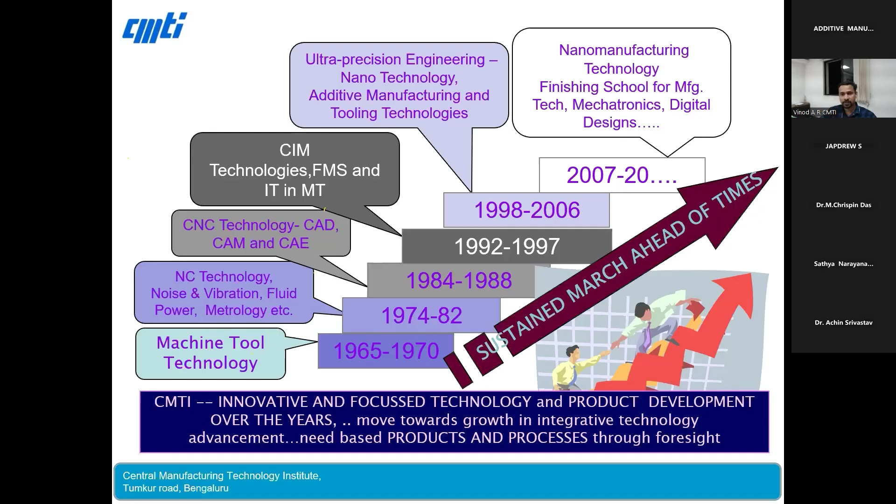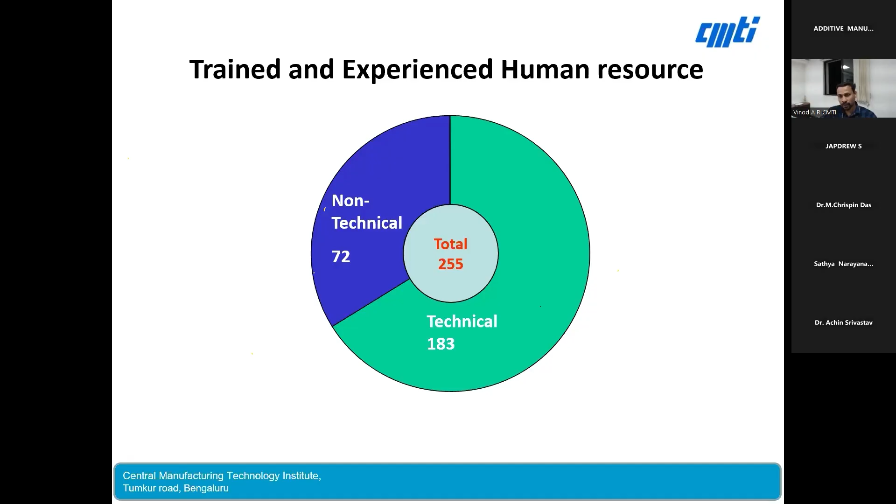If you look at our human resources, we have around 255 permanent manpower, and if you include our temporary staff, it will cross around 400 to 450. Of these, we have around 70 plus scientists, mostly technical, and around 72 non-technical staff. The location of CMTI, as I told, is in Bangalore.

That is the main center. Then we have another unit in Rajkot, Gujarat. These are the only two institutes of CMTI in India. The Rajkot, Gujarat unit is a small unit catering to metrology services in and around that region, but the main facility is already available in Bangalore, on Tumkur Road, near Yeshwanthpur.

Though we are located in Bangalore, we try to serve across the nation, reaching top to bottom, east, west, north to south—we cover almost everywhere. We also try to serve other developing nations, helping countries like Iran, Nigeria, Sri Lanka, and Indonesia to establish centers of excellence in manufacturing. That is how we do it.

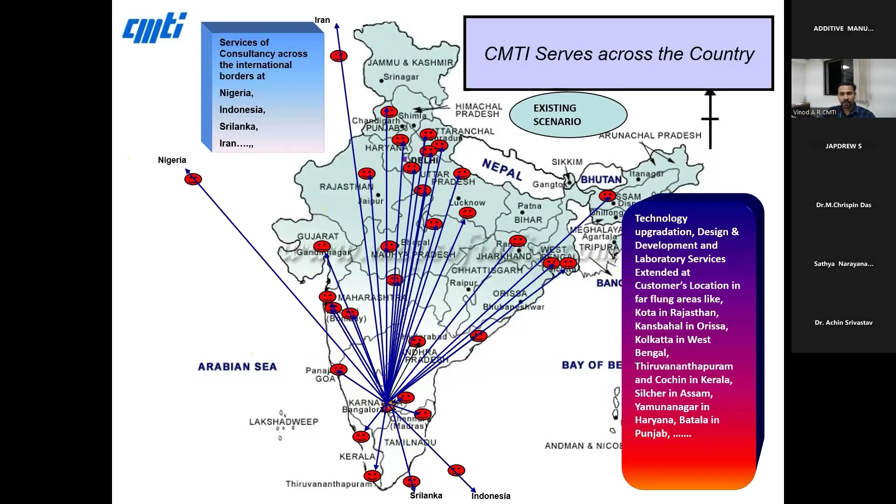Now we will come back to the core topic, that is additive manufacturing. Since you are all mechanical, you'll be aware of it. Conventional manufacturing techniques, like CNC machines, generally start with a block of material, and to make the final shape, we need to remove material. Using a cutting tool, we remove unwanted material and arrive at the final shape. That is the conventional way of manufacturing in the CNC route, known as subtractive manufacturing.

There are other technologies too, like forming technologies—casting, welding, joining processes. Additive manufacturing differs from these conventional methods because in additive manufacturing we add material layer by layer, reading a CAD model, so that finally you have the three-dimensional physical part ready. So in contrast to subtracting or joining material, here we essentially add material to get the final shape. That is how we work in the additive manufacturing process.

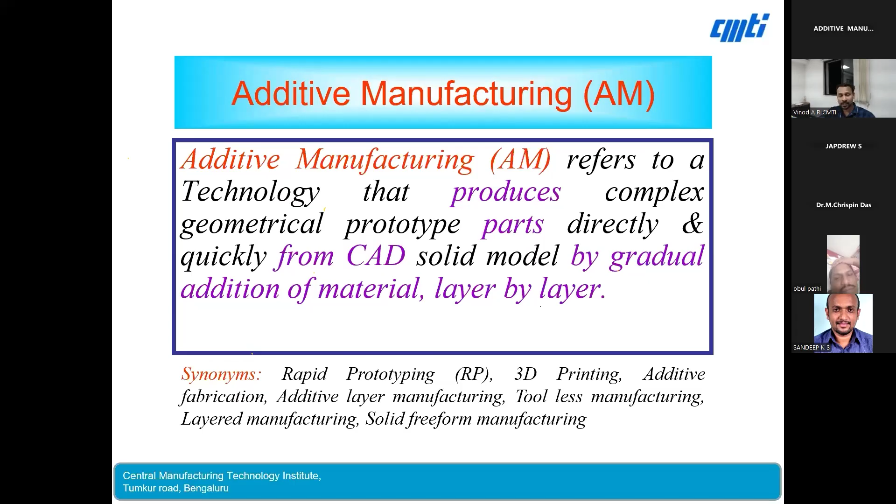There are many synonyms for additive manufacturing. In the early days, around the year 2000, this technology was known as rapid prototyping, or RP technologies. Now it is widely known as 3D printing, which is probably the most popular buzzword. There are other names too: additive fabrication, layered manufacturing, additive layer manufacturing, solid freeform fabrication, toolless manufacturing, and so on. But the international bodies have given this the name additive manufacturing as the internationally accepted nomenclature for this class of technology.

Looking at an analogy from nature, we can compare additive manufacturing to something already available in nature—you might have seen honeybee hives. Honeybees secrete a resin-like or adhesive-like material from their bodies, which gets deposited onto tree tops or rooftops. Over one day, they deposit one layer, and on the second day they deposit on top of the first layer. Over a span of several days, the honeybees build their hive layer by layer, and finally you have the complete honeybee hive.

If you look at the shape, it is so complex that you cannot make it by a CNC machine. The reason is these honeybee hives have hexagonal pockets inside. By CNC machine, you can probably machine the outside pockets to some extent, but the inside pockets form a three-dimensional network that cannot be approached by the CNC route, because the tool cannot access inside pockets.

Nature has made it very simple, by this layer by layer approach, making complex shapes which are not conventionally possible to make by machining processes. If you do the same technology, layer by layer addition of material, in the engineering domain, we call it additive manufacturing.

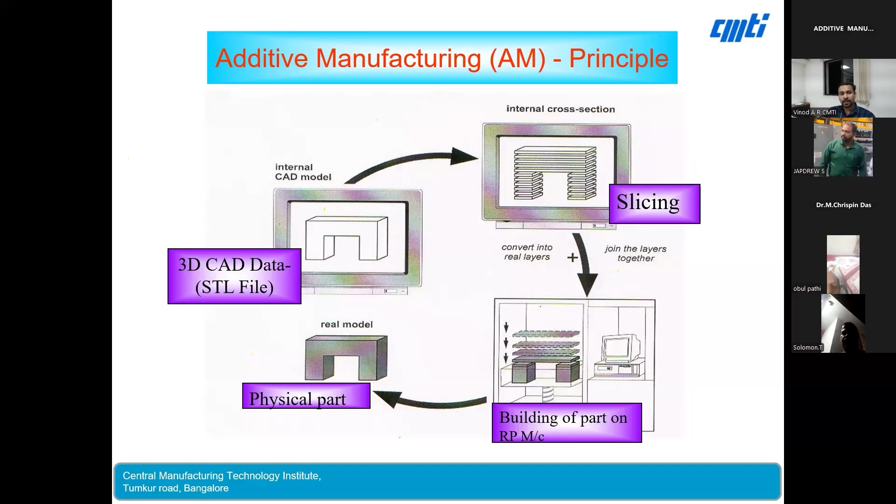Now let us understand, since you have different types of technologies available, why do we need to go for an additive manufacturing process? What are its advantages? Let us understand this, then we'll go ahead with the different technologies.

One advantage is to reduce the lead time in product development. Whenever you talk of NPD, new product development, let's say a designer is designing a new part. Before launching into the market, you need to first make a prototype, and then test its functionality, its aesthetics, and its performance. So when you want to make a prototype, you need to go for a manufacturing process.

For example, if you take a mobile phone or any other part, you need to go for a plastic injection mold. When you want to manufacture injection molds by CNC process, you have to wait, let's say, a few days or few weeks. If it's a highly complex or large part, you need to wait a couple of weeks sometimes. So let's say in two weeks time we have made one tooling.

Using that tooling you make the product or prototype, then you test it, and you realize you need to make some product changes. So for the second iteration, you need to make another prototype, which again takes a couple of days to manufacture. Design, if you look at it, evolves by itself. If there are some 4 or 5 design iterations, it will naturally take a couple of months together to bring the part from design to final stage.

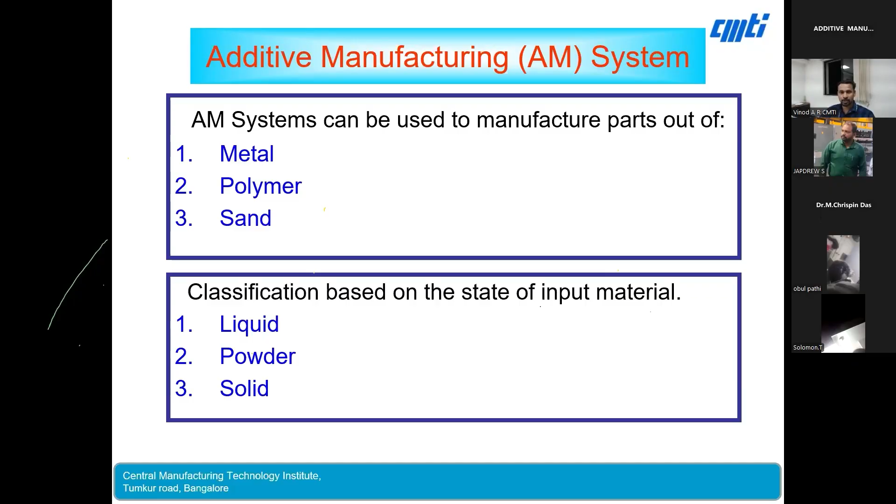Accordingly, you have different types of additive manufacturing processes. As per ASTM F42 committee, that is an international committee who works on the standards for additive manufacturing, they have classified all the different types of additive manufacturing processes globally available into 7 fundamental processes. So these are the 7 types: VAT photopolymerization, material extrusion, binder jetting, material jetting, sheet lamination, powder bed fusion, and directed energy deposition.

These are the international names. If you look at a typical company's machine, they will call it by a different name. For example, stereolithography - this is from a company known as 3D Systems in USA, they call it the SLA process, that is their trade name. Similarly you have solid ground curing. These are all trade names. For example, fused deposition modeling, FDM, that is from Stratasys USA, that is a trade name. All these technologies are similar, and they can be classified under one of these 7 fundamental categories.

In today's session, if you look at VAT photopolymerization, basically they are for making parts out of photopolymers, light sensitive material using laser. So this is photopolymer based. Then material extrusion also is primarily for polymer parts, like ABS material, PLA materials. You have different materials like that.

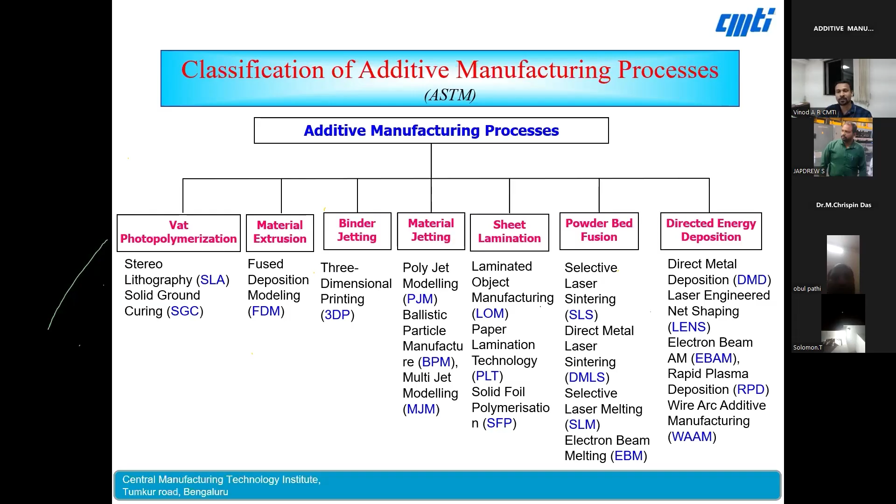You can see these different types of processes and the different materials being used. For example, in stereolithography process, as I told, it is liquid epoxy resin, light sensitive material, which is cured by using a UV laser. In fused deposition modeling, the raw material is in filament form, which will be extruded through a heated extruder head to print the part layer by layer. In three-dimensional printing, you will be spreading a material, then dispensing a binder material. Then polyjet modeling uses photopolymer. So you can see here all these are mainly polymer-based materials.

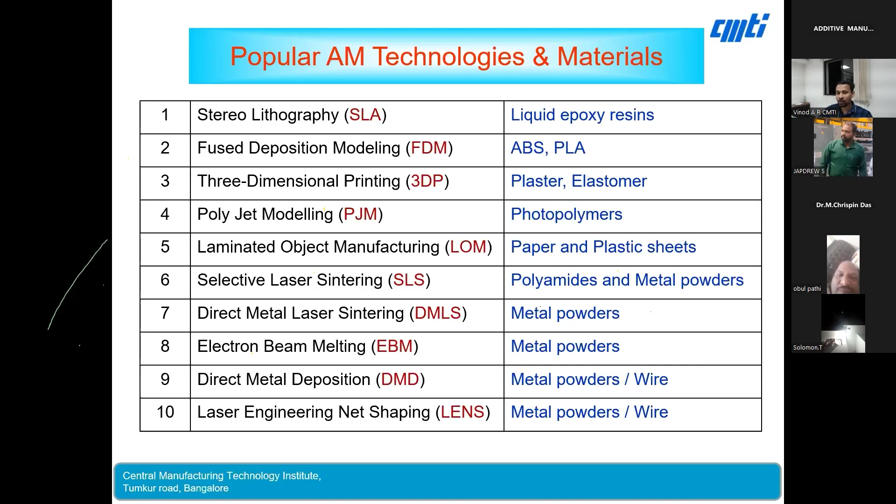Whereas when you come to SLS and DMLS, we can see from here onwards - selective laser sintering, direct metal laser sintering, electron beam melting, direct metal deposition, or laser engineered net shaping. These technologies primarily use metal powders. Especially in the last 2 technologies, you can use either metal powder or wire as the raw material. We'll be seeing these technologies in detail.

Coming to the facilities at CMTI, in fact, we were the first to install a metal 3D printer in India way back in 2000. So 25 years back, we established our first metal 3D printer. Now, if you look at it, there are around 80 to 90 plus machines available in India, that is powder bed fusion. At that time, only one type of material was able to be processed. Later in 2007, we upgraded our machine to process more number of materials.

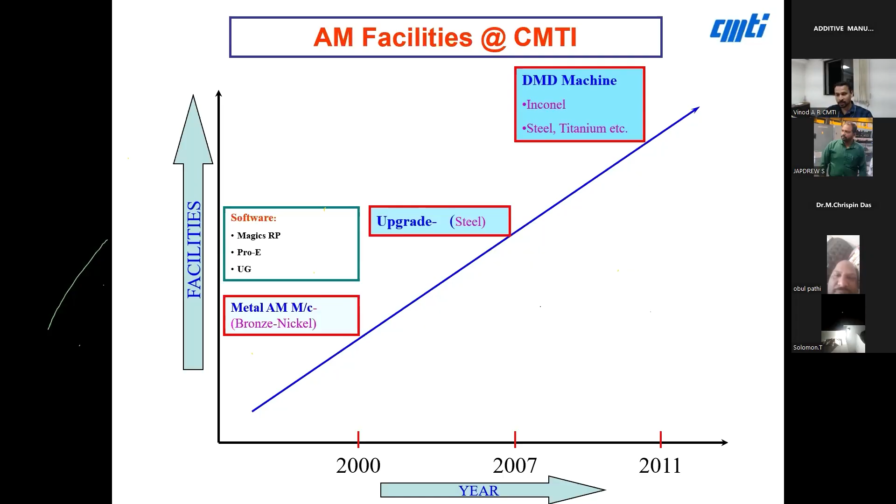Later in 2011, we got our direct energy deposition (DED) technology, which is a 5-axis machine. So we'll see it one by one.

The main objective of the Additive Manufacturing Center at CMTI is to serve industries using metal additive manufacturing solutions, helping them accelerate product development and create solutions for industrial applications. Along with offering services and solutions, we also develop machines, focusing on customized additive manufacturing machines for Indian industries. We also try to disseminate this technology to industries through training programs and guest lectures, reaching both industry and academic institutions.

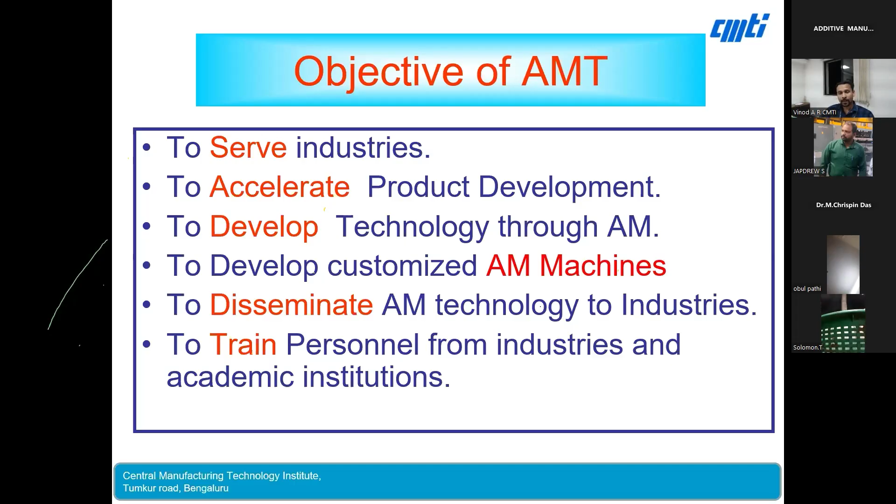Coming to the facilities, as I mentioned, one is powder bed fusion. We have laser-based DMLS, direct metal laser sintering. Then we have laser-based direct metal deposition, DMD. These two are the metal-based additive manufacturing facilities available at CMTI.

We also have another one, projection micro-stereolithography, which was developed by CMTI itself. Basically it's a projection-based 3D printing process used to produce photopolymer-based micro parts, which can have a feature size down to 5 microns.

We have also developed a smart IoT-enabled 3D printer, which can be remotely controlled and monitored. Then there's a smart foundry with 3D printer, also developed by CMTI, which has been deployed at the National Institute of Advanced Manufacturing Technology, Ranchi.

Along with these developments, we also have related software for all these technologies, including Magics, Unigraphics, and Siemens DMD CAM software.

Now we will start with the powder bed fusion technology, that is direct metal laser sintering. This is the first metal 3D printer in India, available at CMTI. This is the machine and these are the subsystems around it.

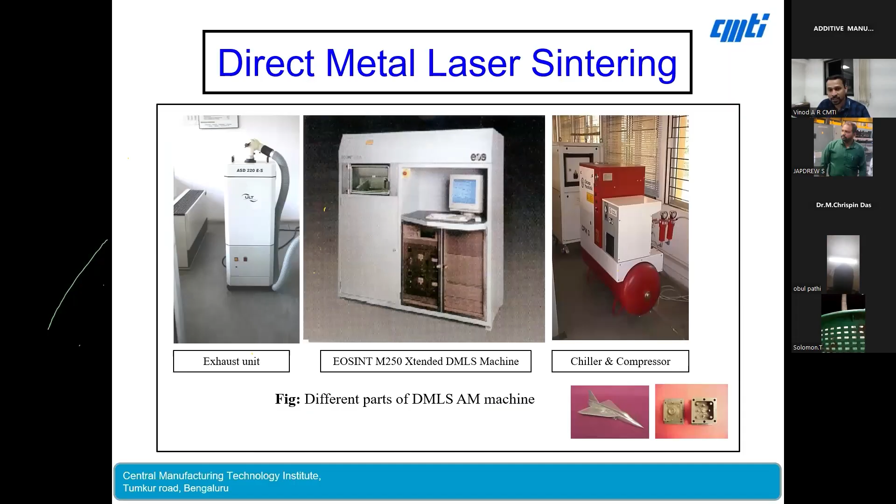If you look at the machine architecture, it is something like this. There are two platforms. One platform is filled with material, in the form of powder, around 20 to 50 microns in size, filled onto a reservoir on the right side. On the left side you have a platform, 250 by 250 size in the XY plane, which will be mounted here. There are two Z-axis motors which can move this up and down.

On top you have a laser source and a scanner, a galvo scanner with two mirrors. There is also a recoater arm or recoater blade, which will move to the rightmost end.

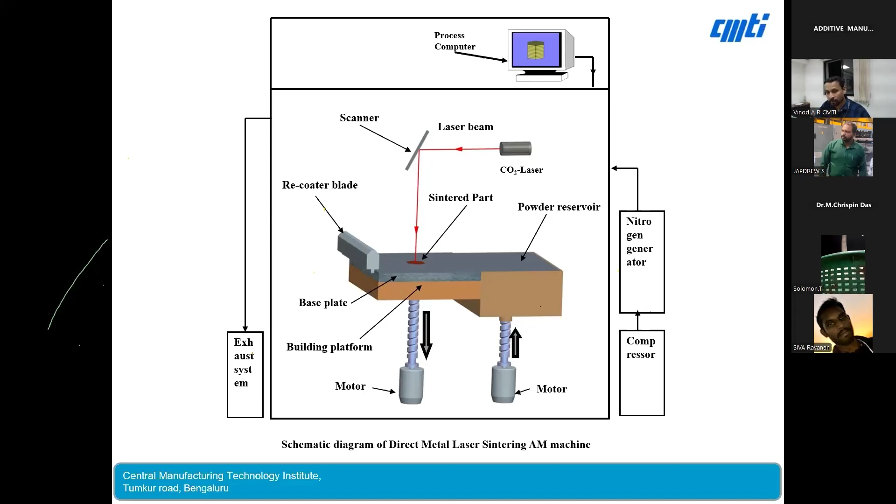This is the sequence of operation: the recoater arm moves to the rightmost end, then the platform containing the raw material powder rises up, and the recoater arm spreads the metal powder onto the build platform. From the top, a laser controlled by a galvo scanner controls the XY movement of the laser beam, focusing it onto the powder bed. Wherever the laser falls, the metal powder fuses completely to form a solid block.

Then the platform goes down again by one layer thickness, and powder is recoated. This cycle continues, recoating and melting layer by layer. This is how the sequence of operation happens in the powder bed fusion process.

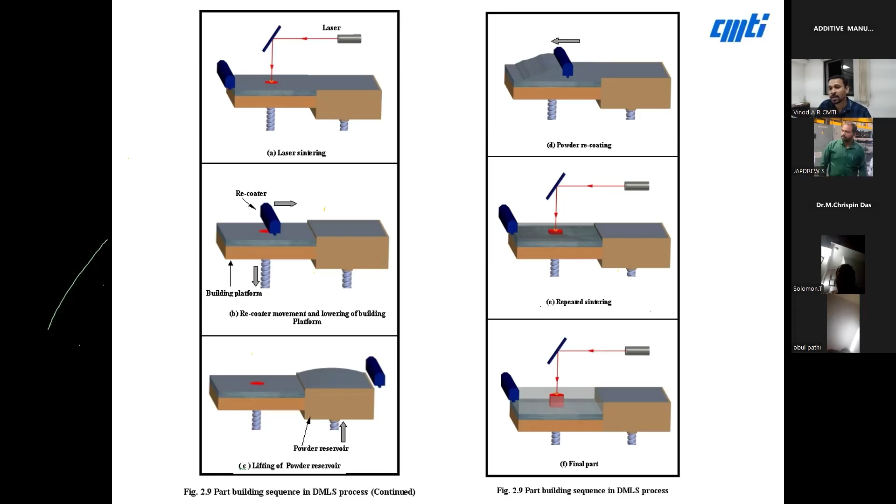Now looking at the applications of powder bed fusion, there are different technologies available. This process uses laser, but sometimes instead of laser, electron beam can be used to melt the powder. With electron beam, you can process only metals, only conductive materials. With laser, you can process either metals or even polymers. Laser-based processes also have higher resolution, better accuracy, and better surface finish.

Whereas in electron beam process, the surface finish will be a little poorer and resolution will be lesser compared to laser, but productivity will be higher. Electron beam based processes are very much used for biomedical applications. But for other applications like aerospace and defense, laser-based technologies are more widely used now.

If you look at the applications, one is for making metal parts, which could be for functional tests, for checking form and fit, or for end applications. Many additive manufacturing parts are flying components now, especially for aerospace applications. It is not only for prototype purposes; the final parts used for actual application can also be produced by this process.

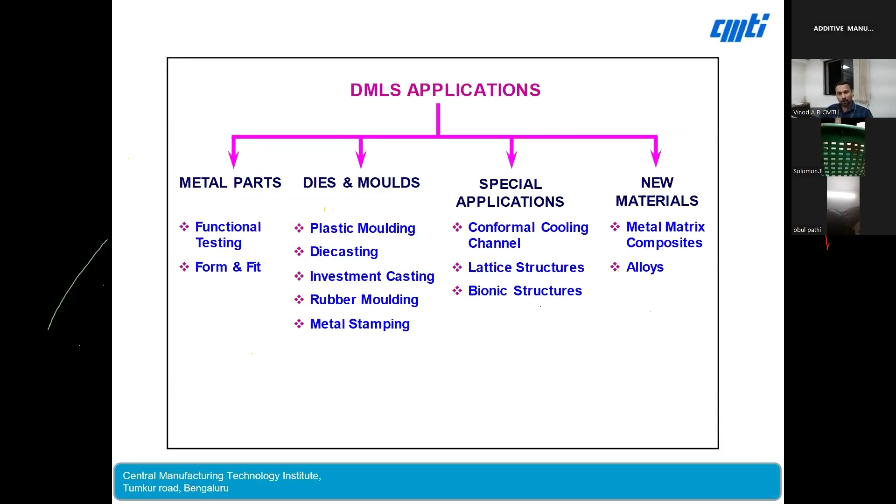So these are the different applications. Now I will give you case studies, typical industrial applications that we have worked on at CMTI.

This is a 1:30 scale down model of an LCA aircraft, around 500 long. Since our machine has a limitation of 250 by 250, we split the part into three, 3D printed them, and then assembled to make this 500 long part. This 1:30 scale down model was used for wind tunnel testing. It took around 100 hours to realize this part by 3D printing, whereas the same part fabricated through conventional process took more than 1.5 months. So 1.5 months by conventional route was reduced to 100 hours by additive manufacturing.

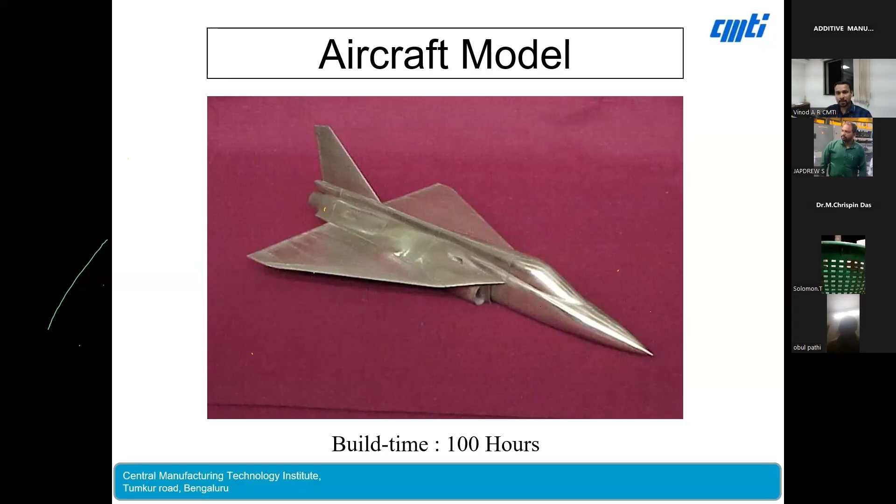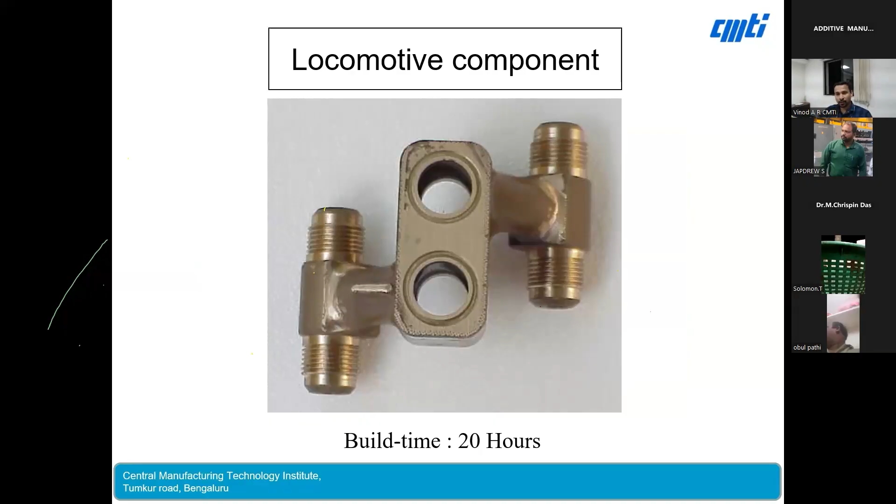Here's another example, an automotive or locomotive part that was printed. You can see the geometry—it has got some thread and two branches. This took only 20 hours to manufacture by this process. The same part, if manufactured by conventional process, would have to be split into multiple pieces, fabricated individually, and then assembled. Here it was manufactured in one go.

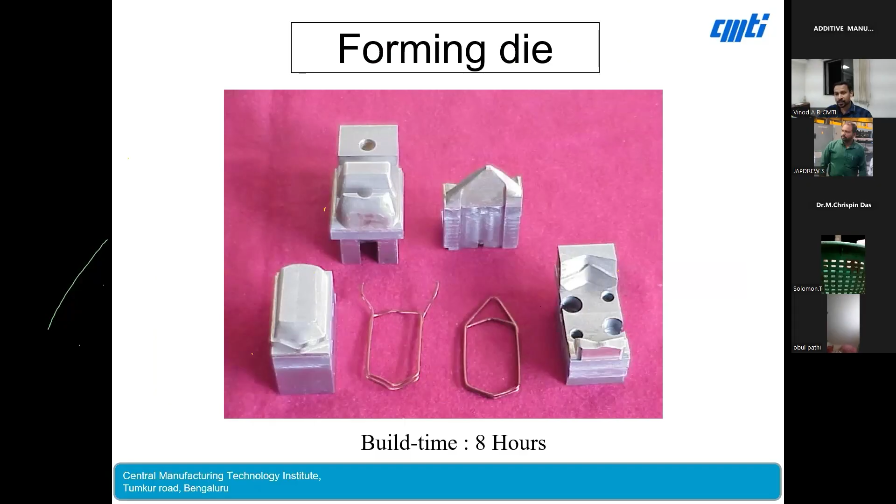This core and cavity was printed in one go, fabricated within 5 hours. Likewise, you have several examples, such as a forming die. This copper foil coil was transformed from one shape to another using this die.

This die was manufactured by this process within 8 hours. You can see bevel gears, for example, this one for an instrument, which will be injection molded from this core and cavity shown on top. This was fabricated in one go using this 3D printing process within 3 hours.

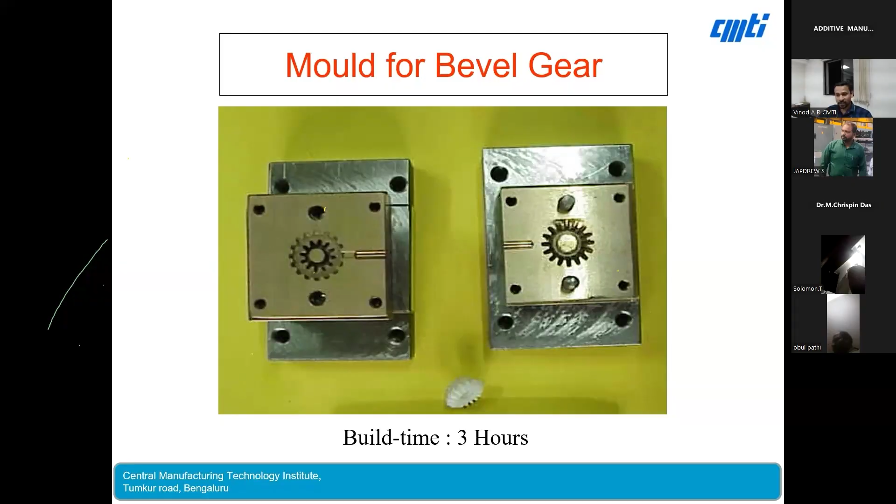You can see some more examples with steel. Previous molds were made of a bronze nickel based material, but this is a tooling steel, basically an H20 tool steel, used for the electronic industry to fabricate this.

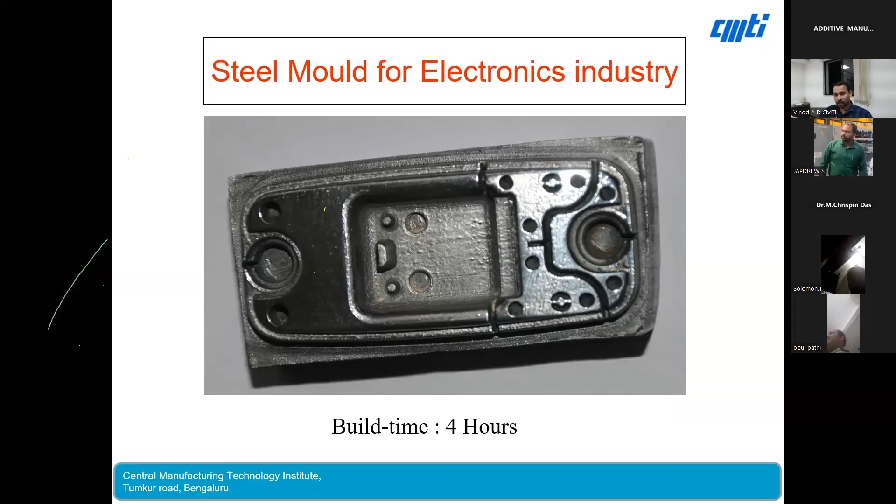Another beauty of this process is that even with multiple components, for example, you can see 6 different parts, all of which can be 3D printed at once in one go. Here you have a 250 by 250 platform where you can arrange all the different components. If you have still smaller parts, you can arrange them in the remaining space. So in one go, all the different parts will be printed. Within 16 hours, all 6 different components were printed.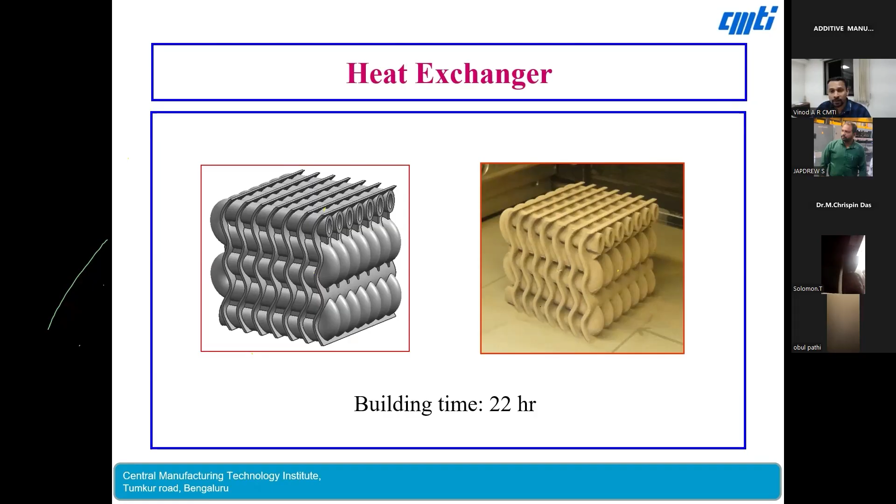For example, inside you can introduce turbulators, which is not possible in the conventional process. Or you can have a different design of heat exchanger with gyroid structures inside, giving higher surface area for higher dissipation of heat. So the thermal efficiency can also be enhanced, giving you compact heat exchangers with lesser cost and time.

Then you can see another example of a diesel particulate filter. This is an example with honeycomb structures. If you look at the shape, it is not a straight honeycomb. If you see the cross section, it is inclined, with three different angles within this design.

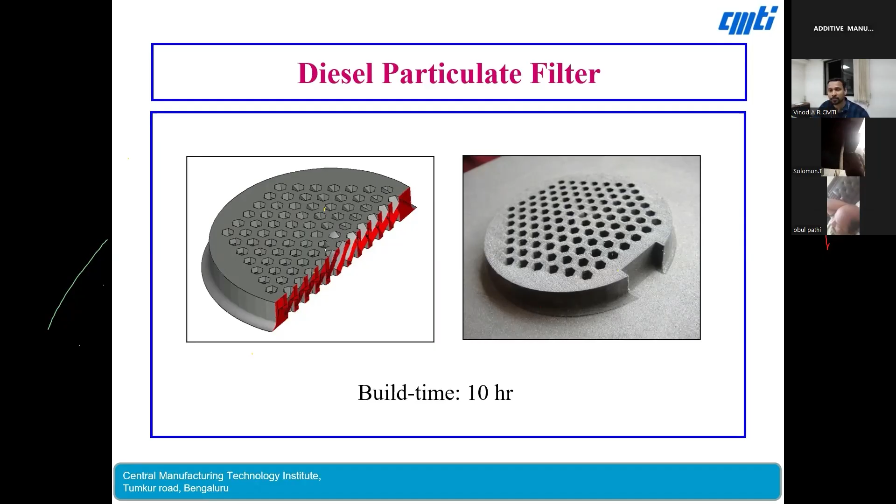If it was a straight cut, we could have done it by die sinking or wire EDM, but here it has an angle, and the angle is not straight - it changes at least twice within the geometry. This was quite difficult, almost impossible, by conventional machining route. So this was made by the 3D printing route, printed within 10 hours for automotive applications.

So coming to next, that is about the industrial application examples for the powder bed fusion process. Next, the most popular metal 3D printing technique is direct metal deposition, DMD. This is a machine at CMTI. It is a 5-axis machine.

Here, what we primarily do is have a laser delivered through a nozzle. Through the same head, you deliver the material - either a powder or wire - and inert gas like argon is also fed through the same nozzle. The laser is focused onto the area where deposition is needed. When the laser focuses, it forms a molten pool, and the metal powder or wire fed to it also gets melted. This whole head moves in 5 axes.

You can have 3 linear axes like X, Y, Z, and 2 rotary axes. So in DMD, you have a head with an energy source like a laser or electron beam, or it could even be an electric arc or plasma.

Different heat sources could be used. In this machine we are using laser basically. To monitor the process, you will have sensors like CCD cameras that will be looking at the melt pool to monitor the layer thickness uniformly.

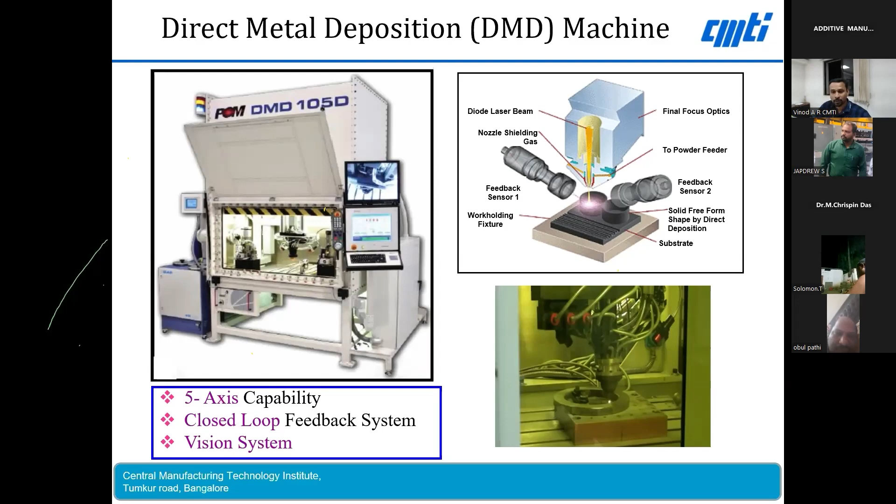Or you can have a pyrometer to measure the temperature and control the process. With this machine, you have a 1 kilowatt laser. The part size is around 300 by 300 by 300, all XYZ 300. You can process most materials like different types of tool steel, stainless steels, Inconel, and titanium-like materials can also be processed.

Coming to applications, in addition to conformal cooling channel printing, you can also do coatings. For example, if you have an existing part, you want to coat upon that. This is not possible in the previous process, that is in powder bed fusion, the DMLS process, we cannot do coating, especially on a 5-axis 3D surface, because there you are spreading the powder layer by layer.

But here we are not spreading. Instead, we are injecting the metal powder or wire onto the surface. Since it has got 5-axis capability, you can do coatings on existing surfaces. You can also do repair or remanufacturing of expensive parts.

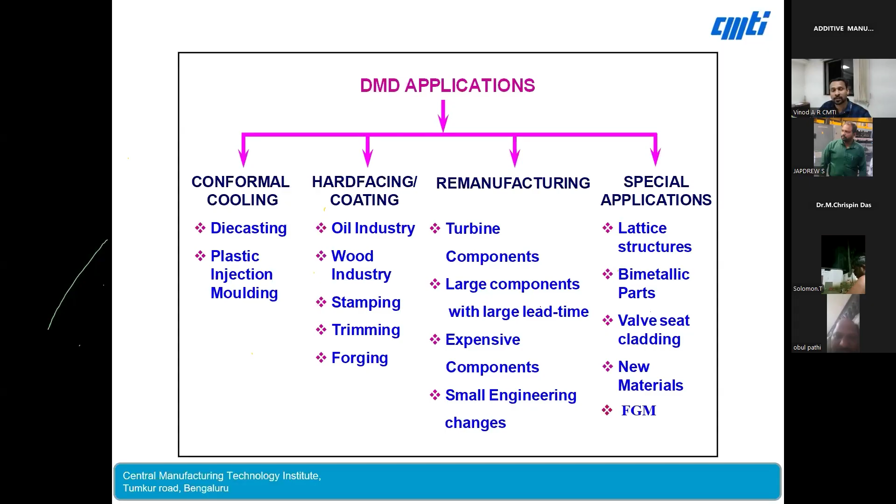Then you can have special applications like bimetallic parts, that means multi-material components, if you want to 3D print. Functionally graded materials you can also do. The multi-material 3D printing is very much feasible in this DMD process, direct metal deposition process.

I will explain with some examples. You can see some industrial examples. This is a pump part which was used for aerospace application for ADA. Here we have to join the steel on top to the bronze on the bottom. These two different materials have different properties, different thermal expansion coefficient, different melting point, different specific heat.

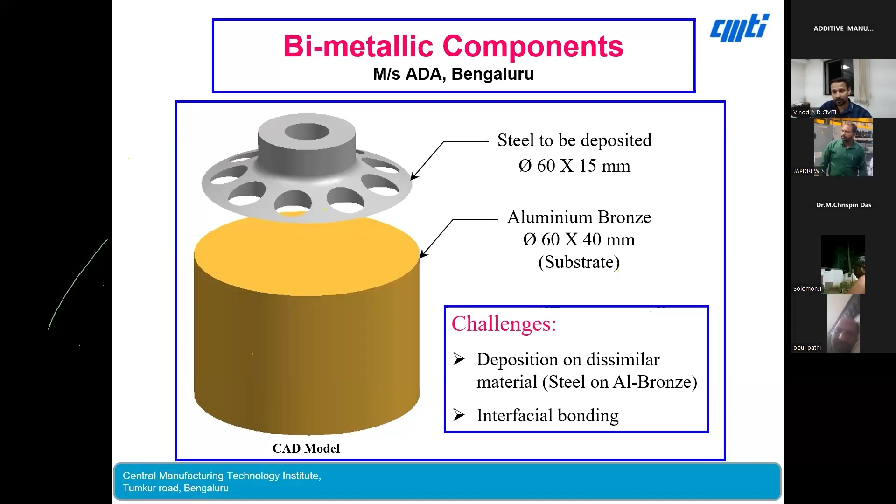Especially when you have two different materials with different properties, it's difficult to join. Generally we use processes like friction stir welding for joining, but there you cannot ensure a uniform bond throughout the surface. That was the challenge we faced, and we successfully developed a technology wherein we can deposit steel onto the bronze base, so that we get good interfacial bonding between the two materials. Finally you can see this bimetallic pump part, an axial piston pump made for aerospace application.

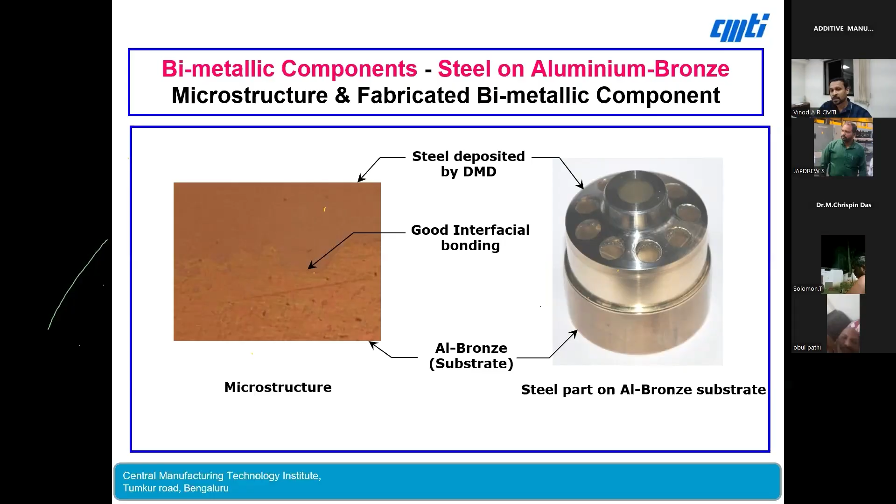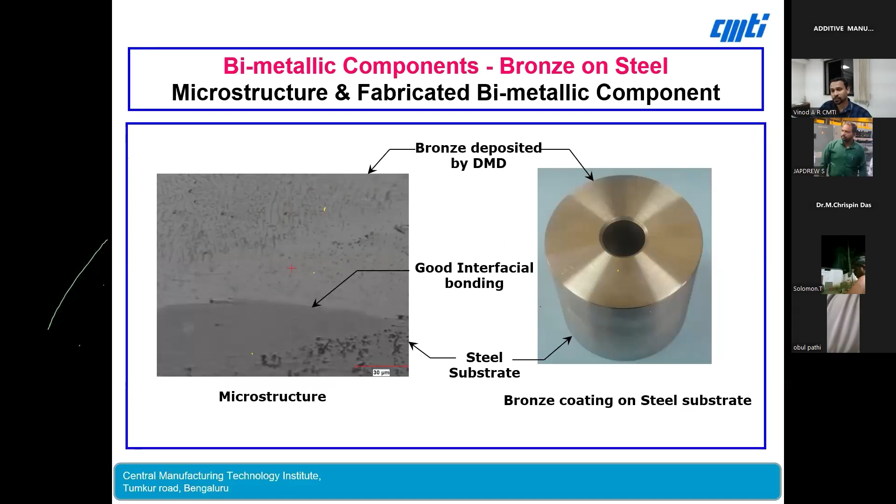Similarly we have done the reverse combination. In the previous case we deposited steel onto bronze; here we deposited bronze onto steel. We did extensive characterization in terms of microstructure, micro hardness, and bond studies to ensure there is a good bond between the different materials.

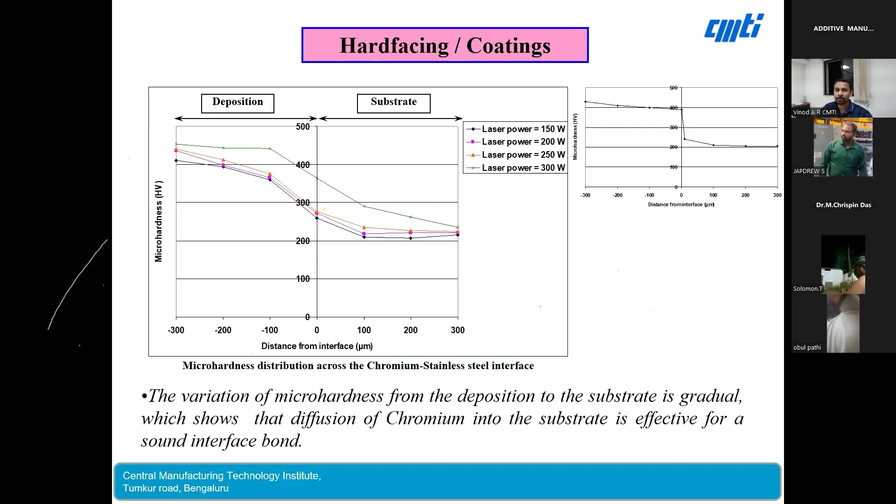We did microstructural characterization and grain size analysis, studying how the grain varies with process parameter variation. This is another example we did for VSSC, for space applications. Here we coated a special material called cobalt-nickel-chromium-aluminum-yttrium alloy, a high entropy alloy, onto a cobalt-based substrate like stellite material.

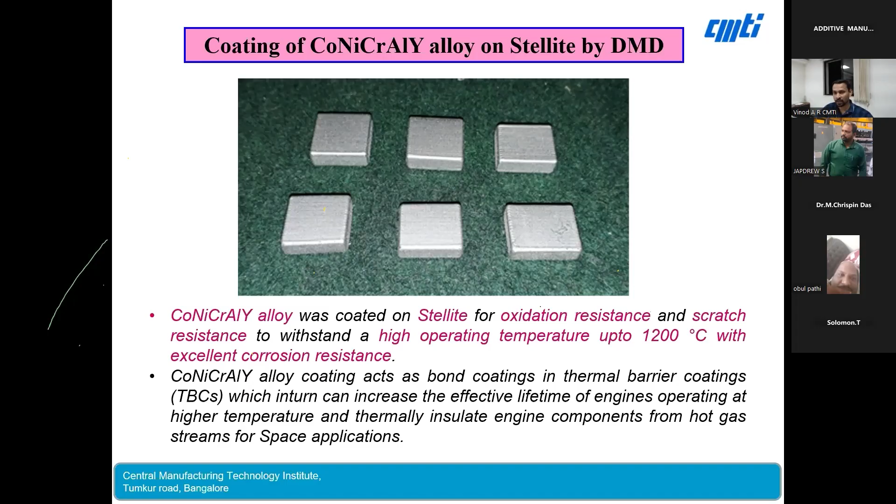Conventionally they do this through a plasma spray technique, but here we did it through the DMD process, direct metal deposition, and compared the life of plasma sprayed coatings versus DMD coated coatings. It was tested for oxidation resistance and scratch resistance up to 1200 degrees Celsius, and it was proven that the DMD coated coatings had higher life compared to the conventional plasma sprayed coating technique. This we did for nuclear applications along with IIT Madras.

This is a Colmonoy coating on SS316LN, again for wear resistant coating. It is effective even up to 600 degrees Celsius, able to retain its hardness without much wear. So this is another example where we can use DMD for coating applications.

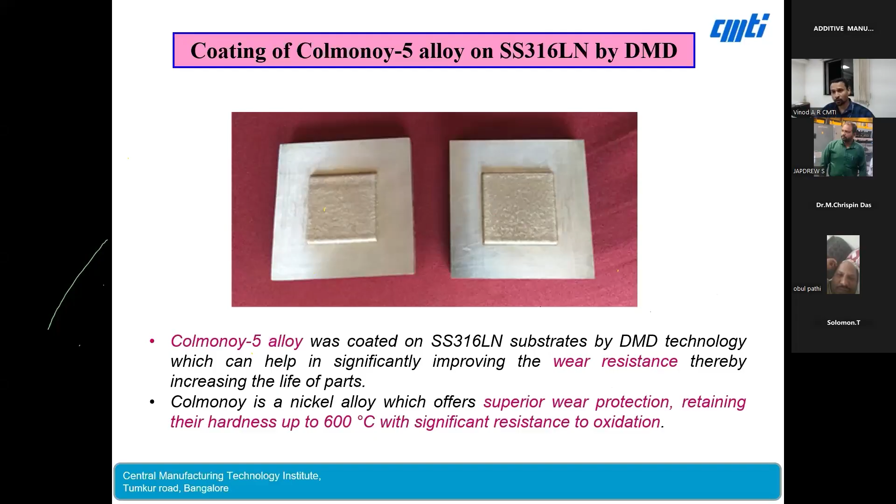This is for remanufacturing application. This is an example of a turbocharger shaft used in automotive applications, which rotates at very high RPM. There is a groove here, which will wear out after some hours of operation.

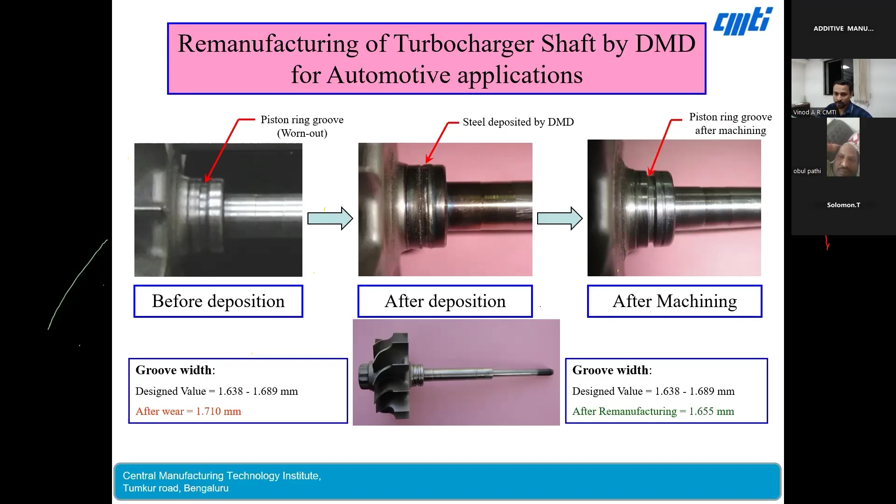Initially when the customer tried with the welding process, it was failing because the welding caused a lot of distortion in the part. With controlled heat we are able to do deposition by laser, and then it was machined back to the design value, thereby recovering the shaft at very less cost compared to the original cost of a new part.

Here is another example for aerospace application. This we did for HAL engine division, wherein there is a pump drive shaft. In the two shoulder areas it was wearing out by around 0.5 mm.

Initially hard chrome plating was carried out, which was delaminating. Since this is a rotary part, when you do coating by electroplating technique like hard chrome, it was peeling off. By DMD we deposited on the shoulders, and then it was machined by grinding.

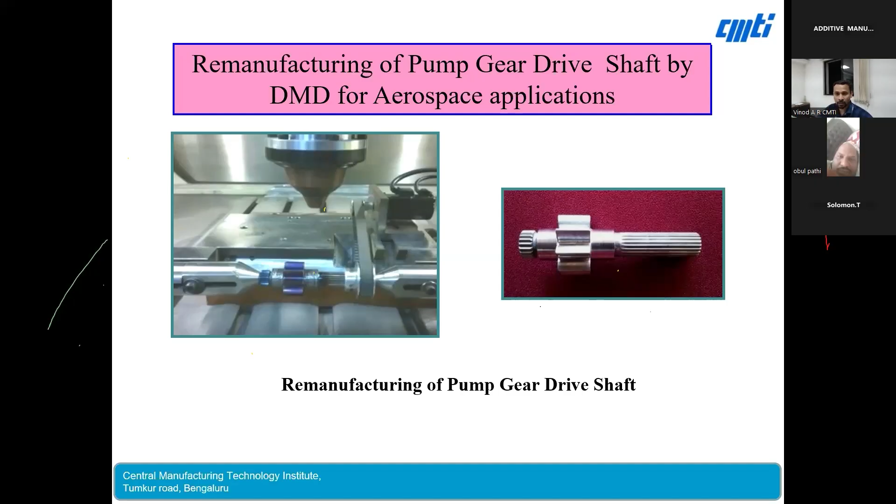After that, when we tested at different conditions, there was no peeling off, and it performed satisfactorily in the test rig at HAL.

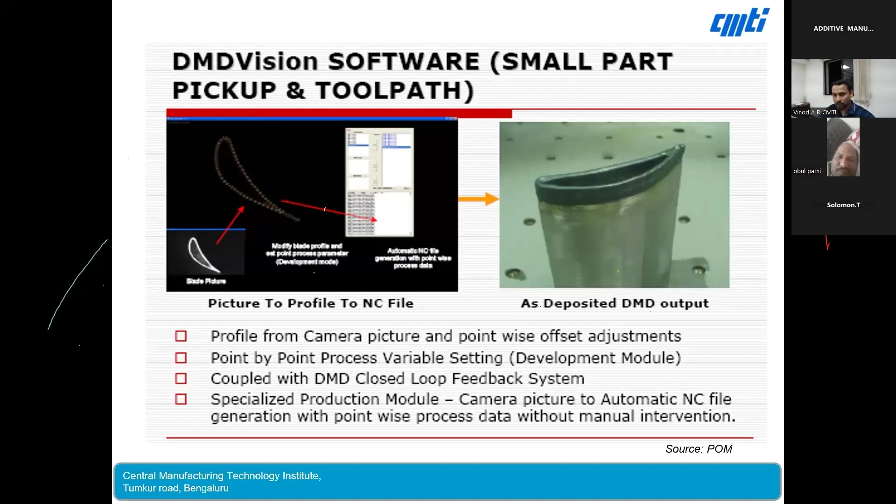Similarly, you can repair a turbine tip in aerospace applications through this process. Instead of throwing away the complete engineering part, you can do the deposition to recover the part, minimizing material wastage, energy, time and cost. You can save a lot, and that helps in green manufacturing.

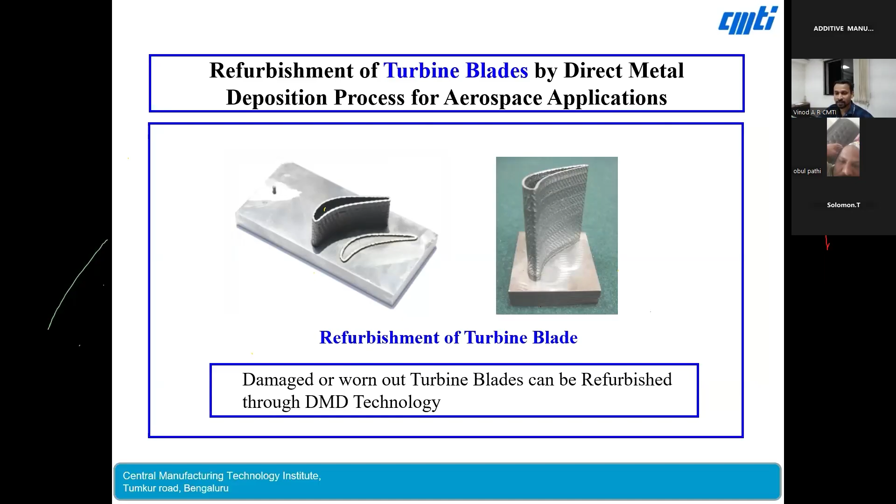Likewise, we have done remanufacturing for other industries also, recovering many fixtures. This is a fixture we did for Kirloskar Industries, a steel-based industry.

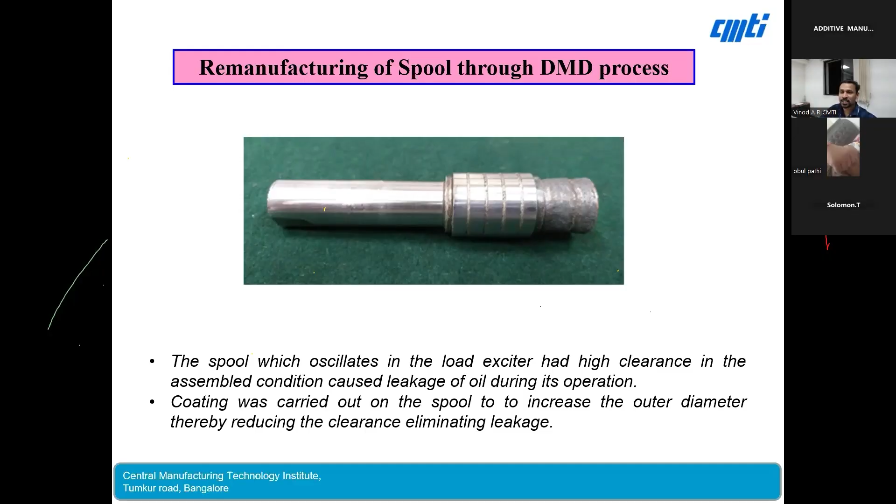We have also done remanufacturing of an oscillating shaft. Instead of throwing away the complete component, we are able to recover the part by coating and then machining. So it is like a hybrid approach: you do material addition by 3D printing process, and then finishing by machining process.

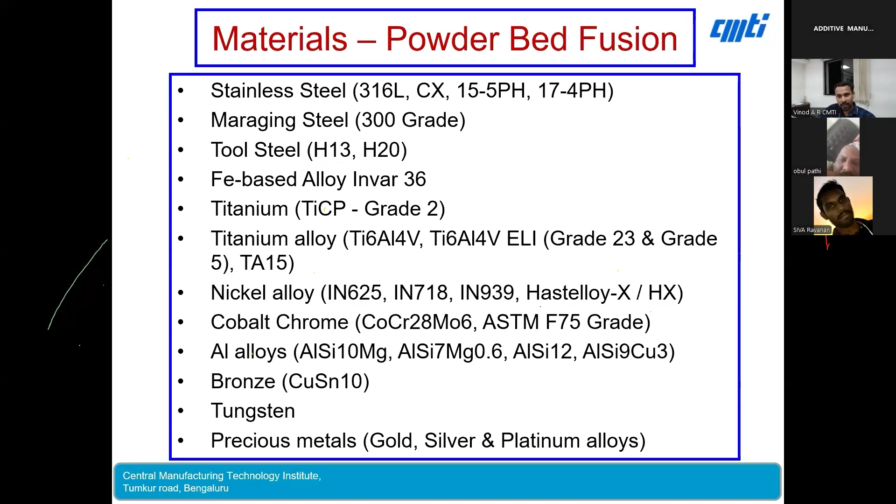Then we have directed energy deposition, DMD. Most of the materials used in powder bed fusion can also be used here, along with some refractory, high melting point materials in the DED process.

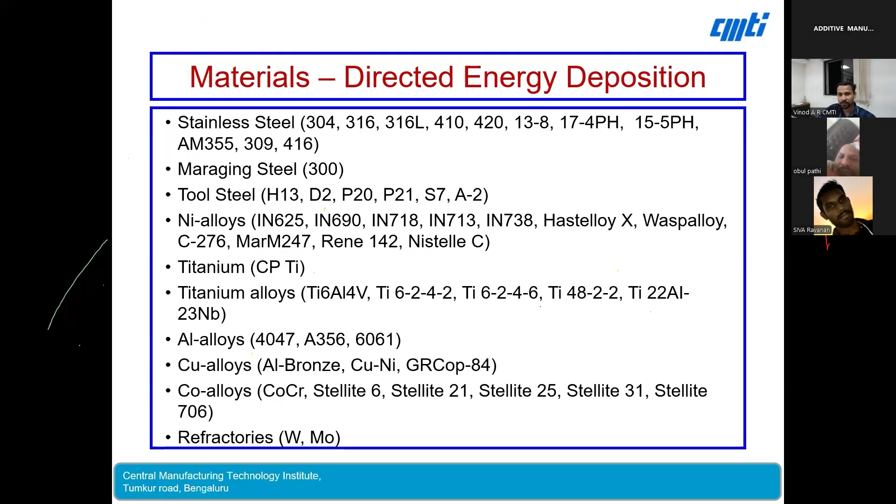Now let us understand when we have conventional processes, you have a choice of many manufacturing processes. So when should you go for additive manufacturing, and when should you not? Let us have an understanding, and I will explain with an example.

You don't need even CNC. You can have a conventional milling machine. So by paying a few hundred rupees, you can get it manufactured very easily.

But let's say in the solid block you have some special feature, for example an elliptical projection on one side. When you have an ellipse in a conventional process, it is very difficult to control manually. The symmetry you cannot maintain.

So naturally you need to go for a CNC milling machine. CNC milling machine is obviously more expensive than conventional milling, so the cost of manufacturing goes up.

Again, let's say in the same geometry you are adding some more features, like a deep rectangular slot with a high aspect ratio. Then beyond some aspect ratio, in milling also it becomes difficult. So you need to go for an EDM process, like die sink, for example.

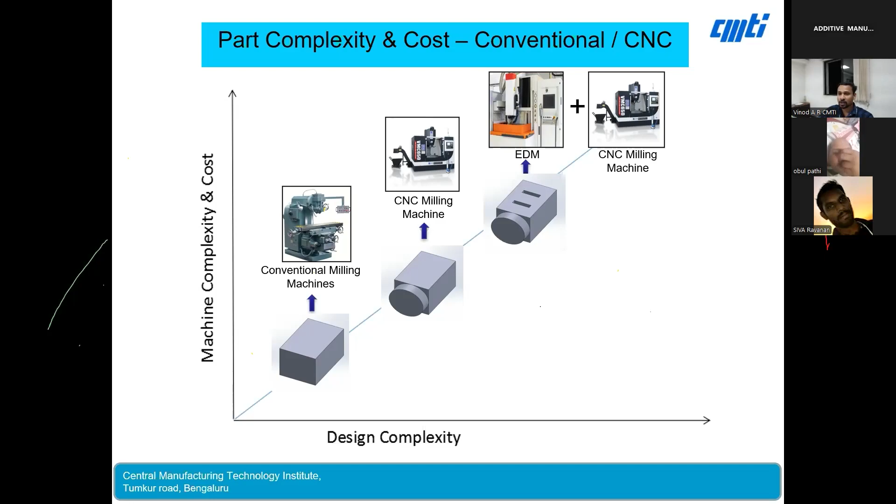For a die sink EDM, you need to make a tool first in another CNC, and then you have to die sink it. So as the design complexity or the complexity of the part increases, the machine's complexity also increases, and thereby the cost also increases.

Whereas in additive manufacturing, beyond a level of complexity, it becomes more economical, because when you have more and more features, you have lesser material to be added. That means if a designer has to manufacture a component which is highly complex in shape...

...then he needs to pay high if he uses a traditional manufacturing route like CNC. Whereas in additive manufacturing, he need not pay extra, because the machine doesn't know whether it is complex or simple. It splits the part layer by layer and then manufactures it. That means especially for a complex part, additive manufacturing becomes more economical.

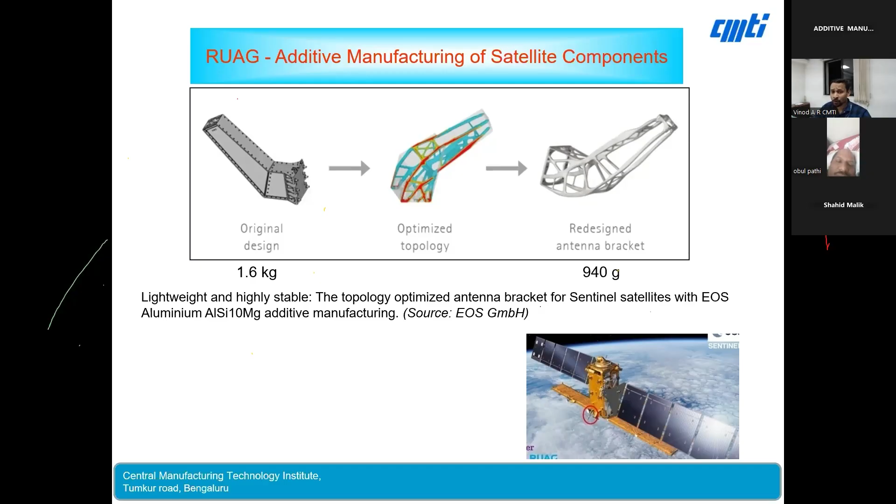But this type of shape is very difficult to do by conventional process. In additive manufacturing, we can easily produce these shapes. So the weight has been reduced, and the number of parts for assembly has also been reduced here.

So what is the benefit out of it? You can see when the weight is lesser, the fuel consumption of the aircraft also comes down. So over the whole lifespan of an aircraft, you would have saved so much gallons of aviation fuel. So even if you pay a little higher for this manufacturing, you'll be getting benefits down the line by saving on the fuels.

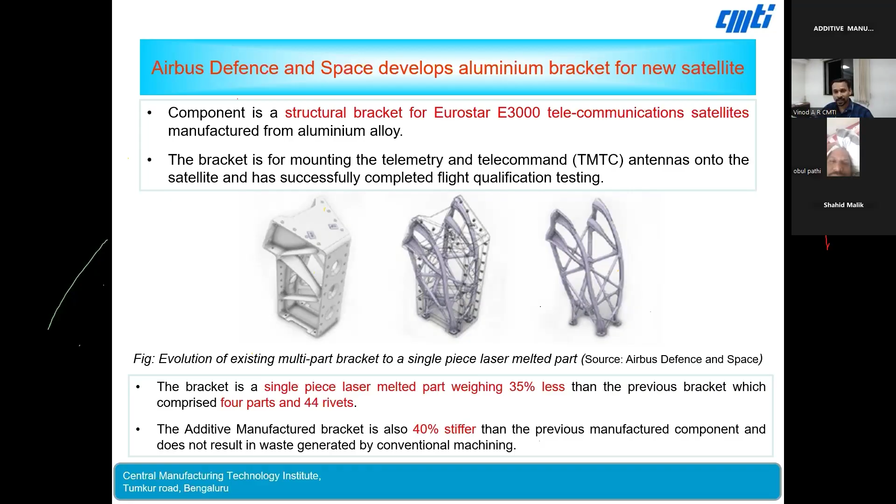That is the reason aerospace companies are very much interested in this additive manufacturing process, because there the volume is less, not in huge numbers. Only a few hundreds or tens of parts need to be manufactured. For that, additive manufacturing becomes very much economical.

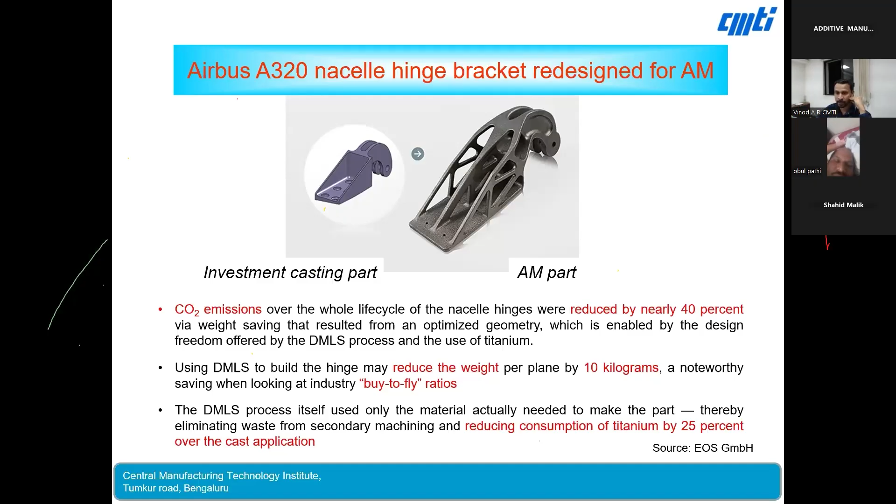In terms of that, it is truly possible to make high strength-to-weight components with a high buy-to-fly ratio. There is something called high buy to fly ratio, which I think you may be aware of in aerospace.

For example, let me give you one illustration. This is a part, a gooseneck bracket. If you want to manufacture this part by the conventional route, the design is quite difficult, and the conventional design would be something else. But if you look at the weight of the part, initially you take 17 kg of this block. After machining, the final component will be only 1.5 kg. That means the remaining material is getting wasted. That is called high buy to fly ratio - how much material you are buying, and finally how much weight is actually flying.

For such components, additive manufacturing is very much beneficial, because instead of removing 80 to 90% of material, you're adding only the 10% which is just required. Added to that, you can build highly complex geometries.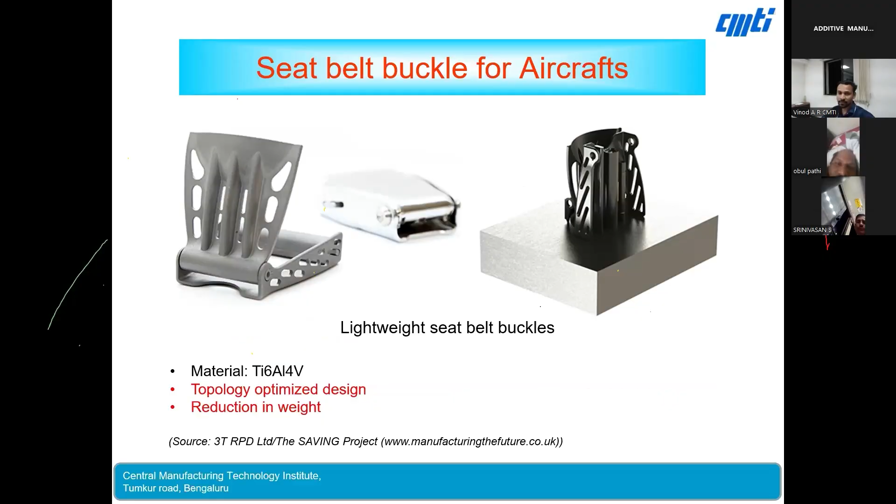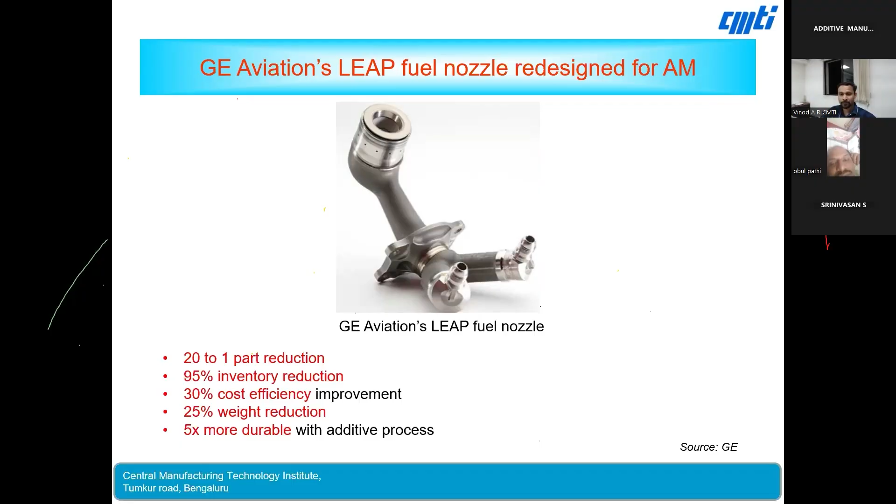And this is another example of a monolithic thrust chamber.

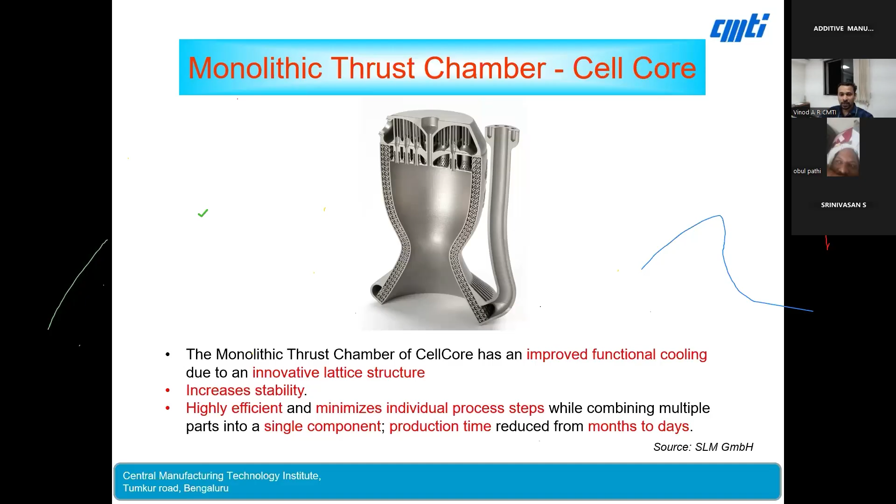You can see this part has a lot of lattice structure within the wall to make it lightweight. This type of lattice structure cannot be machined within the wall. So when you print the part, you can make it with lattice structures, making it very lightweight but very strong. Also, if you have cooling channels inside, you get more efficient cooling because of the higher thermal management.

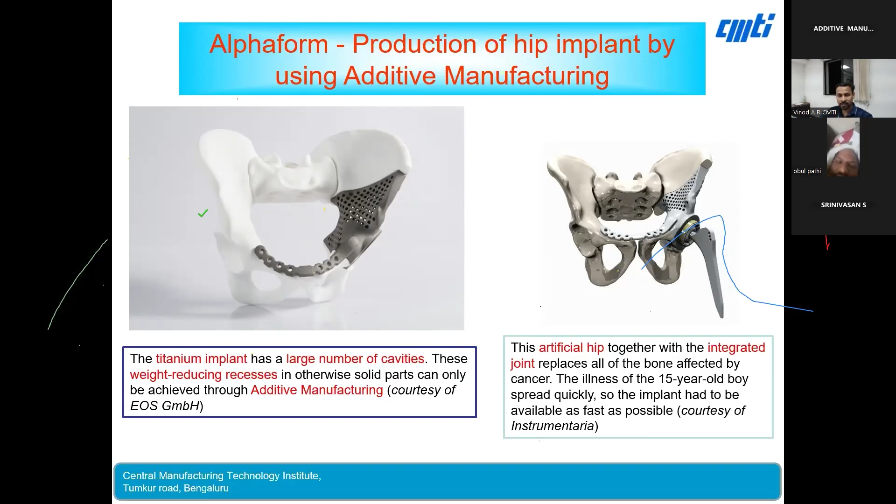So like that, you can have several examples. This is a biomedical part, a hip implant. You can see it is highly complex, customer specific, a patient specific implant. It is quite difficult to manufacture by CNC, but very much possible by additive manufacturing process.

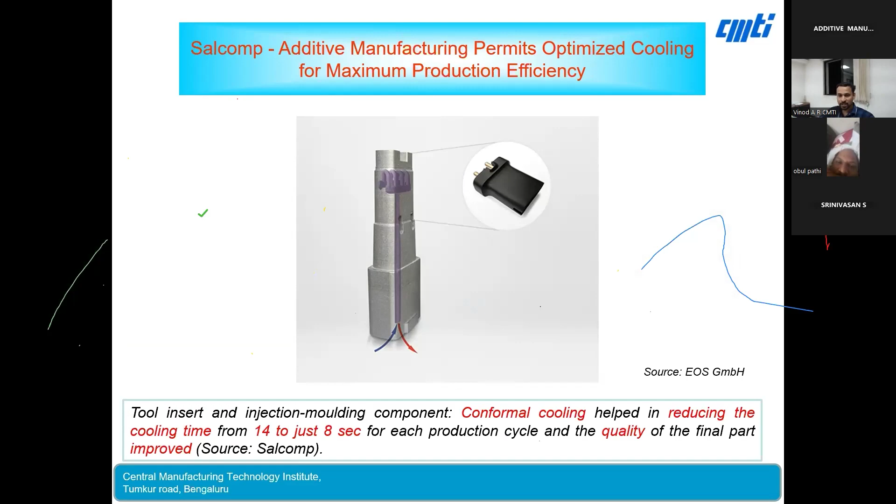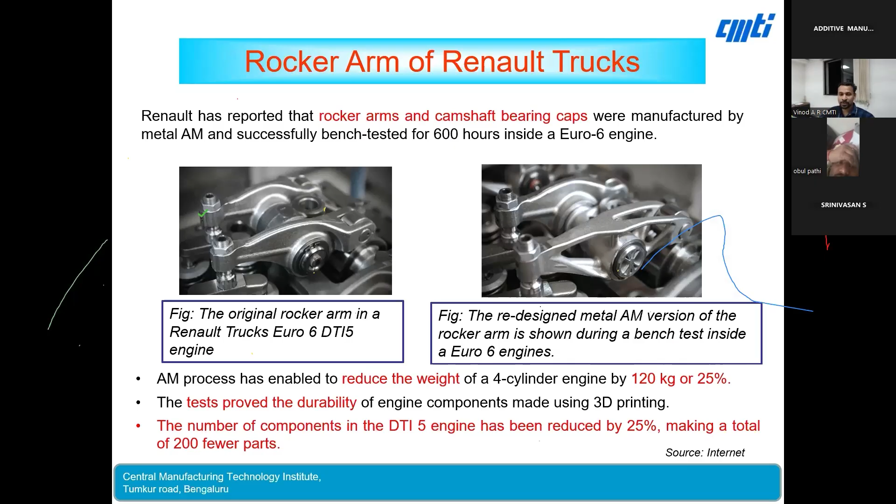This is an example of a rocker arm design from Renault truck. This is the conventional design on the left side, and on the right side is a topologically optimized part. Because of this additive manufacturing process, they were able to reduce the weight by 25%, and the number of parts also got reduced by 200 fewer parts. Durability has also been tested after the 3D printed parts were introduced.

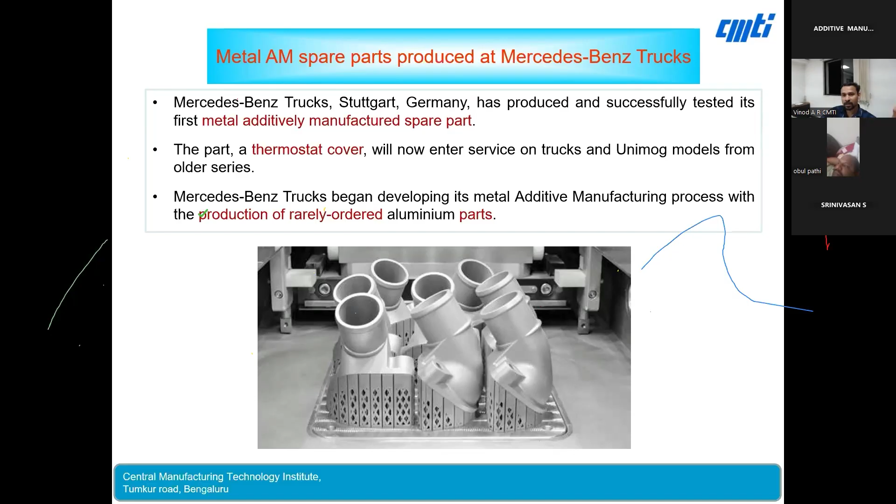There are so many examples like that. You can see Mercedes-Benz trucks. Especially when you have limited edition automobiles, instead of stocking spares in huge numbers, you can have a digital library of your spares. Whenever needed, on demand, you can take the CAD model and 3D print and supply it. That way, spare part supply can also be made possible.

You can see some design examples. Let's say you have two channels combining into a single tube, two fluids combining into one. If you want to make this under loading conditions from top and bottom, either you can have a solid block which will be too heavy, or, for aerospace applications, you can do optimization wherein you have lattice structures like this, which will be very lightweight and very strong. These structures are very difficult to make by the CNC route, but very much possible by additive manufacturing process.

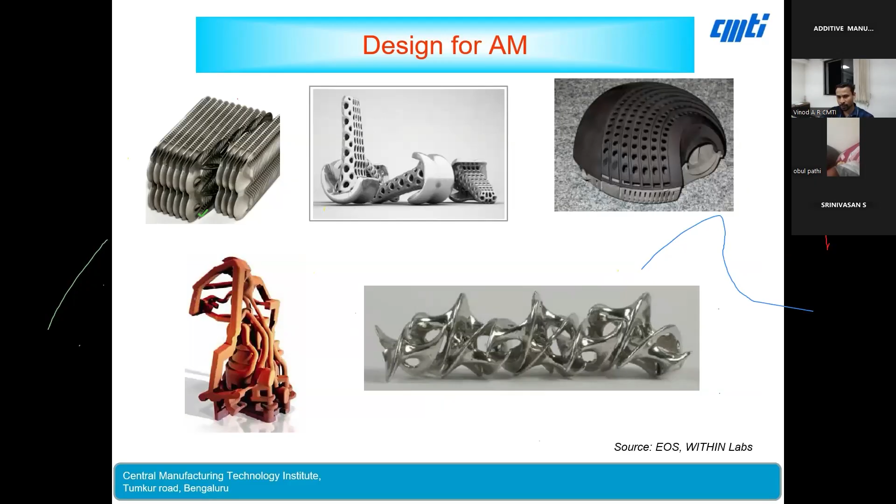Like that, you can have different examples for aerospace or biomedical applications as well. And as I told in the beginning, for biomedical applications, mass customization is a key benefit.

This is an example wherein, in a single platform, 461 different parts with different designs are printed in one go. In 22 hours 20 minutes, the whole set of customized dental parts is made in one go. This enables the process to become more economical. Otherwise, if you try to make the same thing by the CNC route, it will be very difficult, time consuming, and more expensive. Whereas for biomedical applications, this becomes very economical since we print the complete part in one go, enabling mass customization.

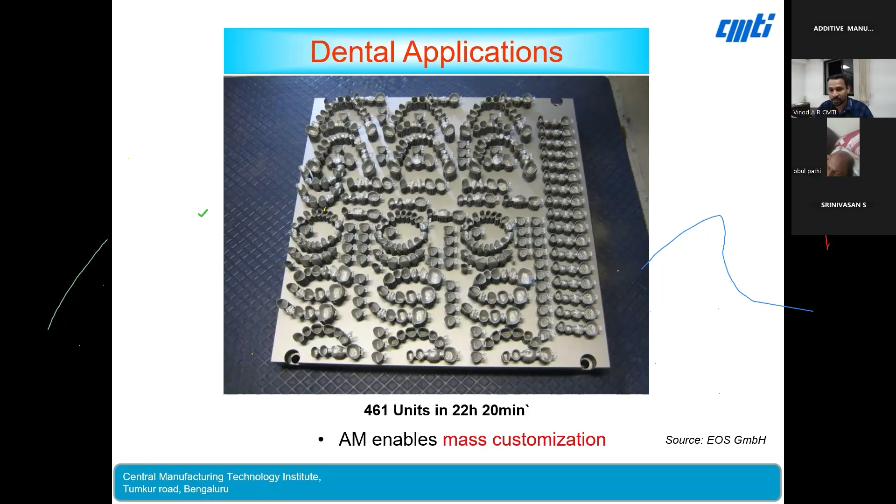To conclude, in additive manufacturing we can use this process for making complex parts more economically. Shapes that are impossible to make by CNC are also possible by additive manufacturing. Not only single material components, but bimetallic parts can also be produced. You can remanufacture expensive engineering components like turbocharger shafts, helping in green manufacturing. You can also do hard facing, meaning coating with corrosion resistant or wear resistant coatings. You can make conformal cooling channels with better efficiency. You can make molds and tooling within shorter lead time, and also metal matrix composites. You can make functionally graded materials. So that is about the different applications.

To that I would like to add one more thing. We are also working on a new machine. If you look at the machines available in India, most are imported. For powder bed machines, there are some companies who manufacture in India for the DED process, which is very much beneficial for making bigger parts, but there is no machine which has got indigenous subsystems within that.

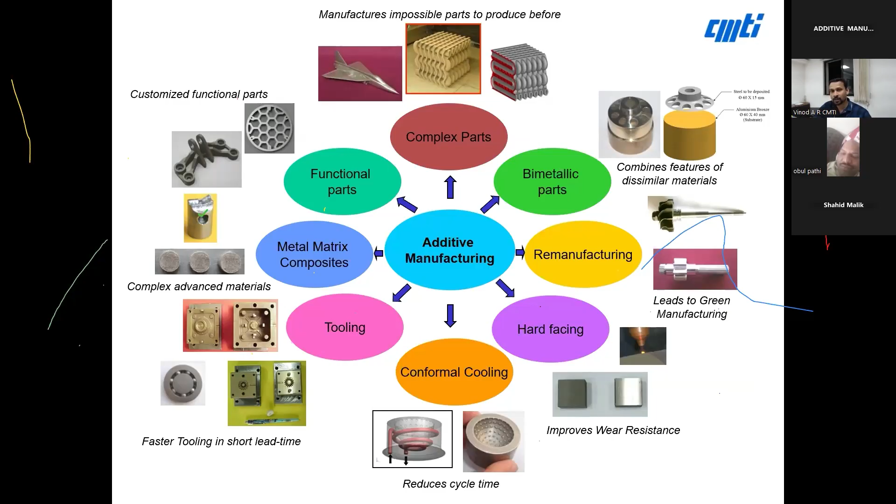As part of this, CMTI is working on a new project for development of a laser based directed energy deposition machine. We are partnering with an industry in Gujarat to develop this machine. It is a wire-fed laser based machine which can go up to 1 by 1 meter size, and it has a 5-axis capability, with all major subsystems developed within India itself. So that is about this new machine.

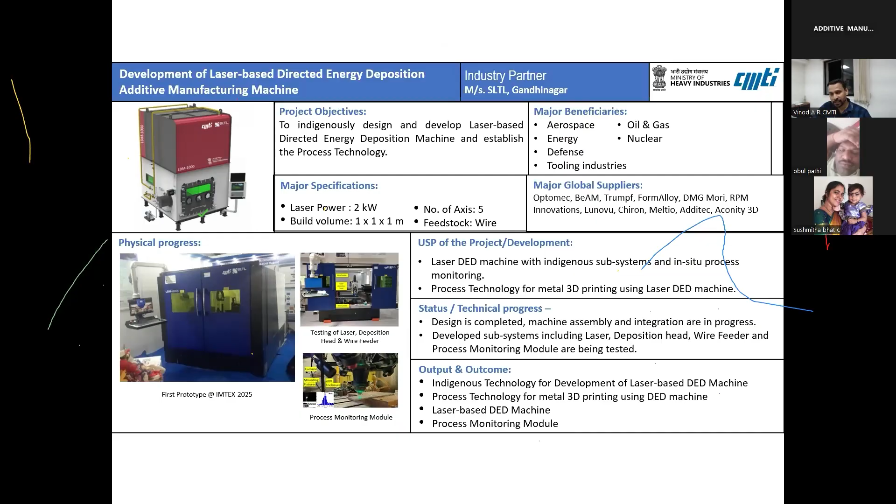This machine is under development, so it will take another couple of months to become ready. We displayed the first prototype at the IMTEX exhibition in Bangalore International Exhibition Center, BIEC Bangalore, last January 2025. This is the first version of the machine for non-reactive materials, and the next version is coming up, which will be ready in a few months' time.

So with that, thank you all of you for your kind attention. If you have any questions, you can ask now, and this is my contact detail. If you have any requirement, you can let me know and we can discuss. Thank you.